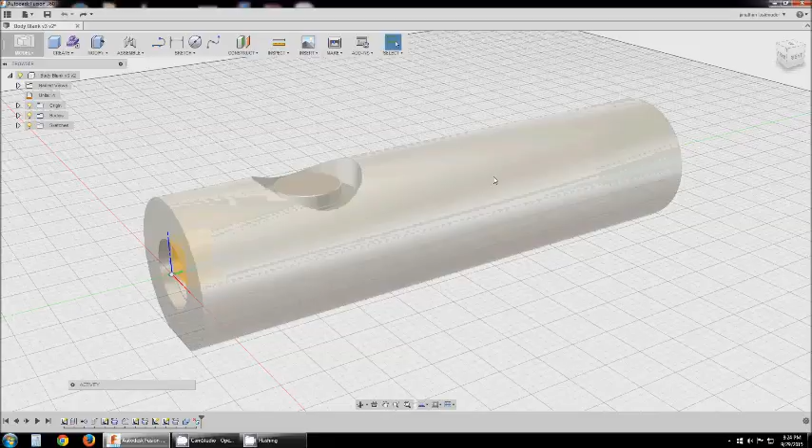This is a quick example of how to make a feed port on a paintball gun body or breech assembly, assuming that you have the cylindrical portion of the body or the breech adapter already modeled. The way I like to do it is by starting with a section view.

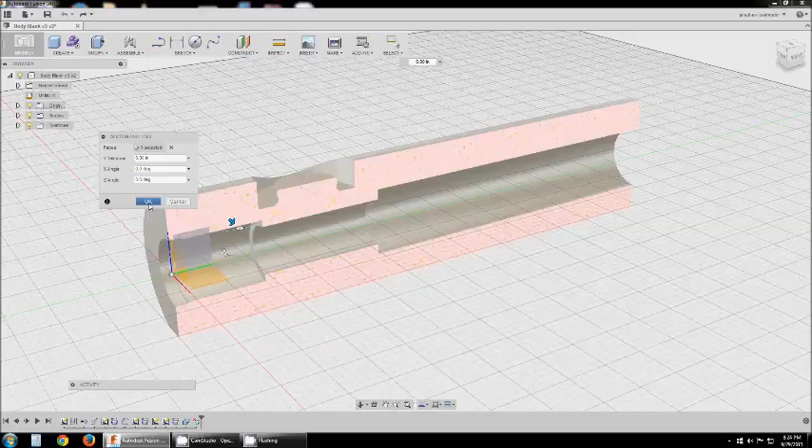In Fusion, you go to the Inspect menu at the top, go to Section Analysis, and select the plane or feature that will intersect the view plane that will slice the breech portion in half. I've done this drawing based on the default planes and axes in Fusion. Go to the view that presents it at the side like this and begin creating a sketch.

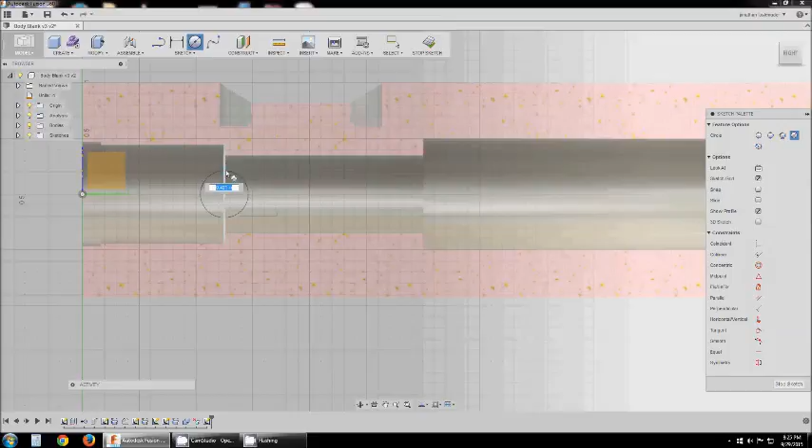I find it easier to start with some construction geometry that matches the internal features that I've already modeled. If you see the small blue triangle, it indicates that I'm hovering over the midpoint of that line, and it lets me snap to the existing geometry. I can turn this into construction geometry in the selection pane on the right in the sketch palette.

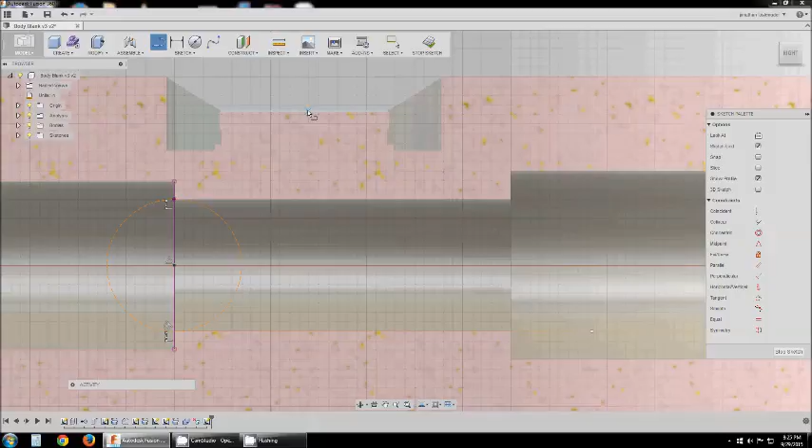And because I have the feed neck itself already drawn, I can move along the top of it until it snaps to the midpoint, again indicated by the blue triangle. Draw a line until it snapped to 90 degrees. If you hit the tab button, you will go to an angle if you want to enter some arbitrary dimension other than 90. Select the check mark to escape out of that command. Turn that into construction geometry as well.

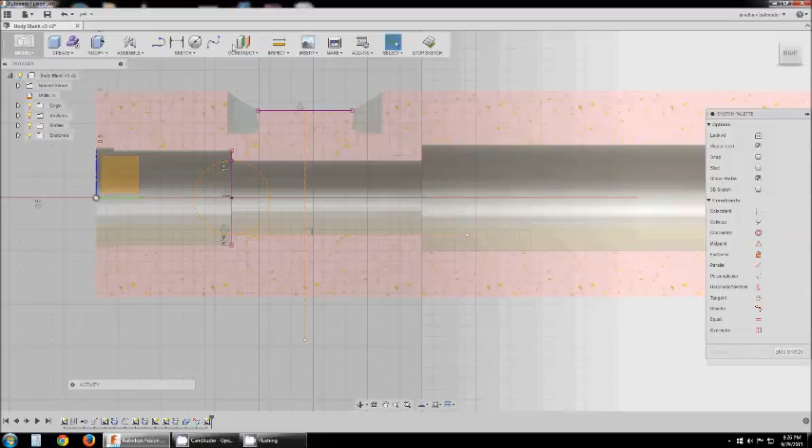And I'm going to assume the dimensions that were used by AGD in the slug body drawing, which was essentially a 3/4 inch ball end mill plunged into the body to bottom out with the breech, the bottom of the bore. So I've got the 3/4 inch circle drawn, which will not be construction geometry.

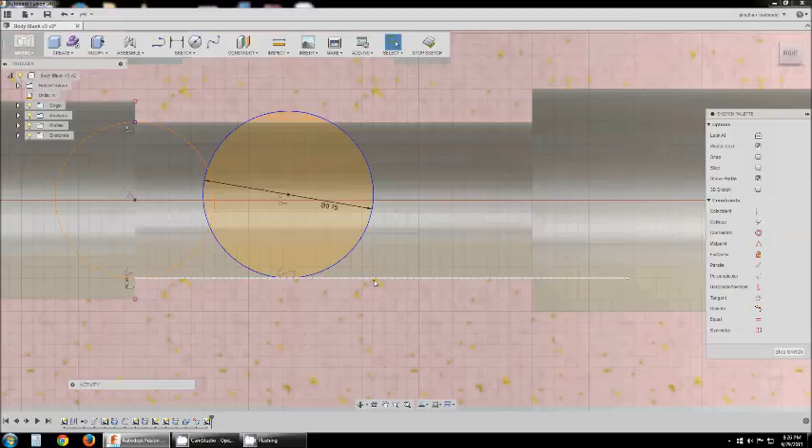So what I can do is I can select that, hold down the control button, and also select the lower body, the line that I drew as construction geometry along the bottom of the bore, and I can tell those to operate tangent to each other, which will drop the 3/4 inch diameter circle down to the bottom of the bore, as this was already fixed geometry to the midpoint that is now aligned correctly.

I can now pick a line, pick an approximate quadrant point on the circle, and draw a line going up. Again, it'll snap to 90-degree intervals unless you tell it to do otherwise. I can now select both the line and the circle and tell those to be tangent to each other. That will move the line to be tangent to the circle, so it's no longer approximate to your quadrant. It is actually snapped to your quadrant point.

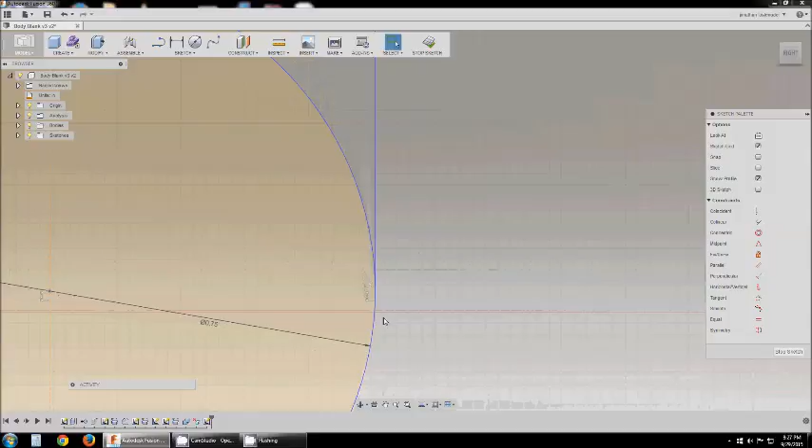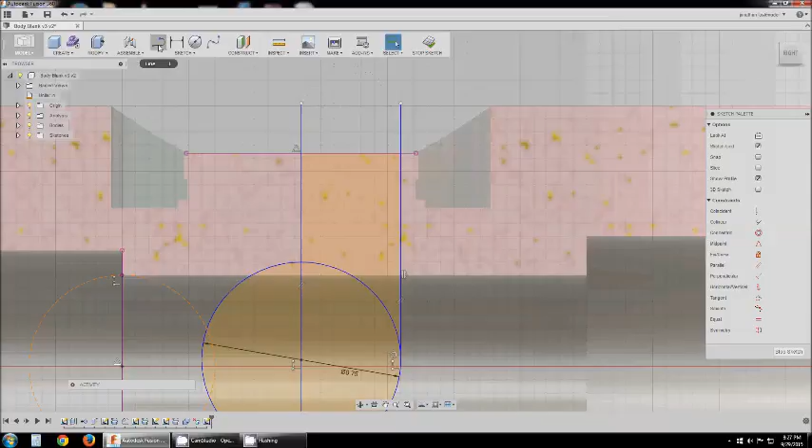Now continue to the bottom section, which will snap to the intersection of the first drawn vertical line and the bottom quadrant of the circle. And close your geometry as if you were looking at a half section view of a ball end mill. You can then go to the sketch menu, go to trim, and remove the components which are not relevant to a revolved feature, which again would be essentially half of a 3/4 inch ball end mill.

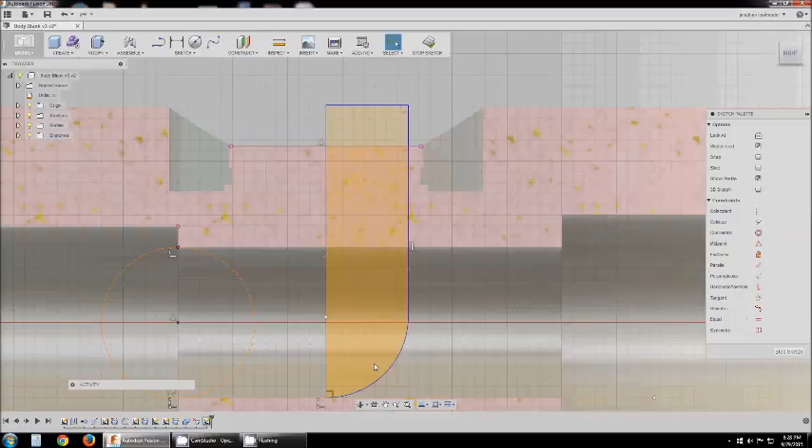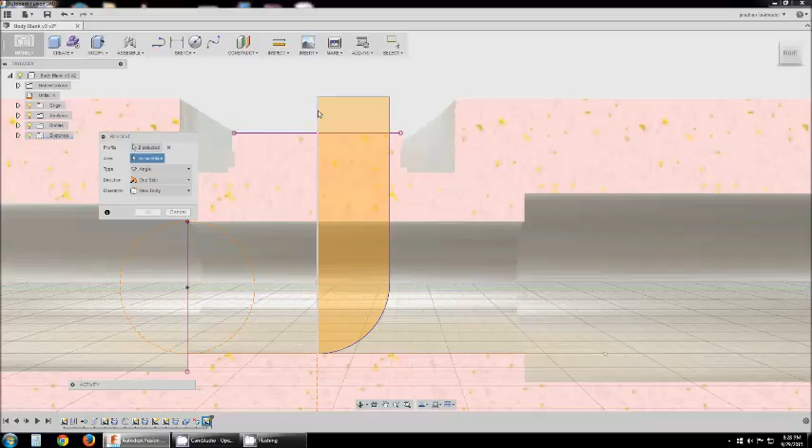You can now stop the sketch and go to the create menu at the top and choose revolve. For your profile, you would select the components that you drew. It may force you to make more than one selection to get the entire profile selected. Now select Axis in your Revolve menu and choose the center line of the breech, and it will make this revolution.

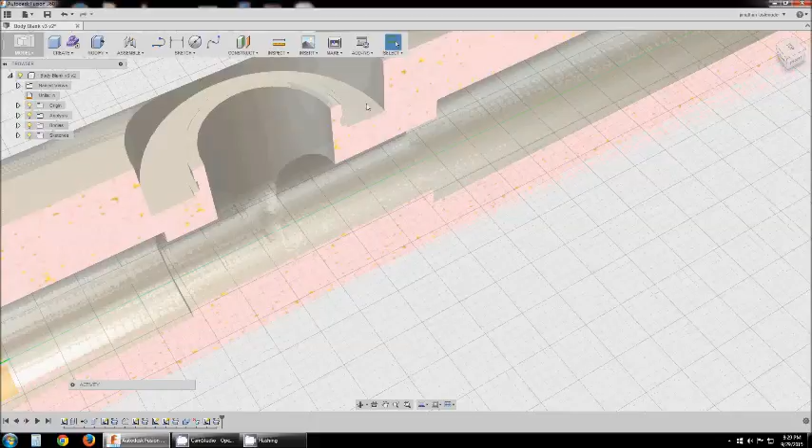If you are intersecting a body, the default option for operation will be cut, but if you want to join, create a new body, or any of these things, you can select it right there. For this, we obviously want to cut it, and select OK. You now have a round bottom hole through the breech as if it was cut with a plunge cut from a 3/4 inch ball end mill.

If you want to see the body without a section view, just go over to the analysis option on the left hand side of your browser and turn the light bulb off, and your body or breech insert is now complete again, and you can see the radius along the bottom of the breech to eliminate any sharp transitions.